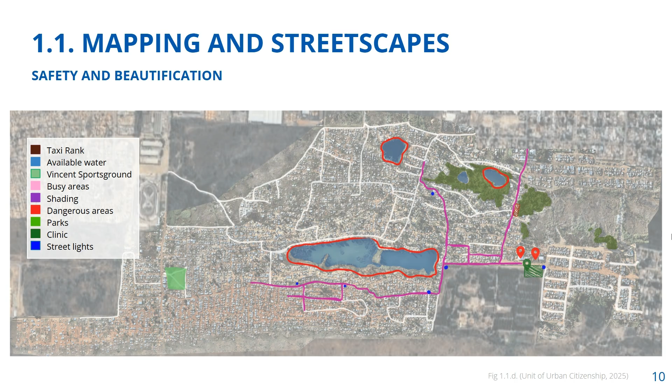The safety and beautification of Melusi is an important factor in community development. Potential areas to improve were pinpointed and discussed, from dangerous electrical wires to streetlights, and discussions around water as a key factor in ensuring safe mobility and well-being.

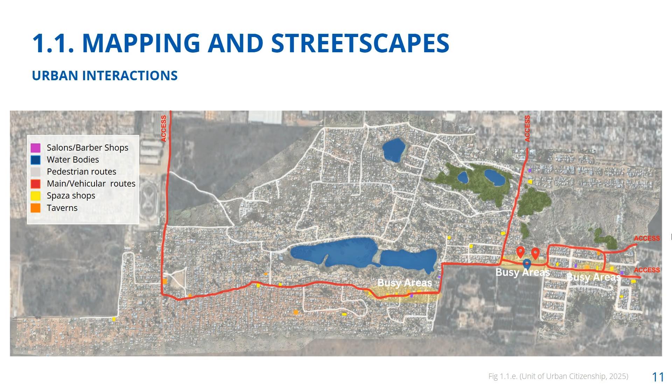In our other mapping group, we established that roads and pedestrian pathways are integral to the functioning of Melusi. Everyone is dependent on the road infrastructure on a day-to-day basis. The roads also set the stage for economic opportunities.

A desktop study was also conducted off-site to enrich our understanding of what the City of Tshwane's proposal entails. The information shows proposed roads, servitudes, and the layout of proposed residential urban areas and important buffer zones around water bodies. Our site proposal is highlighted in red.

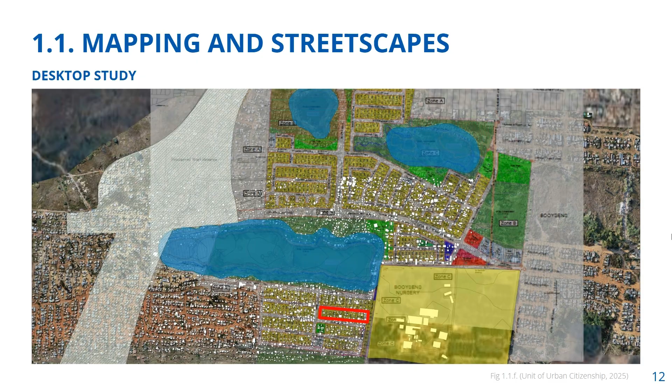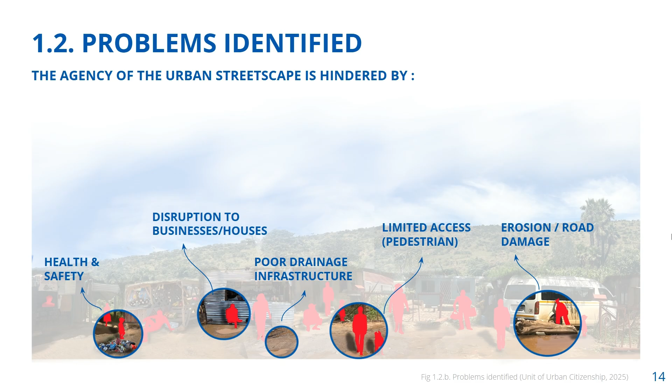Next, we identified several critical issues affecting the community. These include health and safety concerns, business disruptions, poor drainage, limited pedestrian access, and erosion. However, when we examined these challenges in depth, we found that they all trace back to a single underlying root cause: water, its movement, stagnation, and mismanagement within the community.

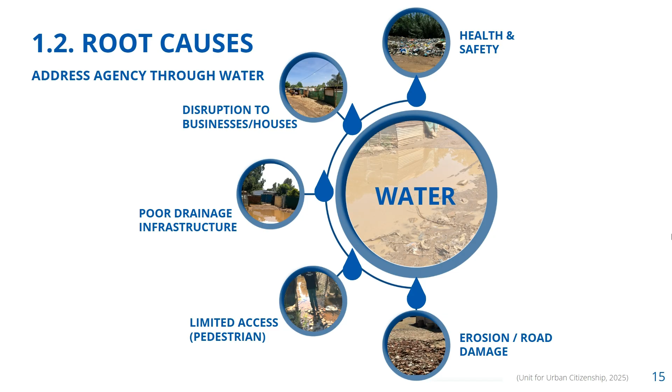Health and safety: contaminated water increases the risk of diseases. Flooded walkways increase injuries, and stagnant water creates breeding grounds for pests and rodents, thus worsening hygiene conditions.

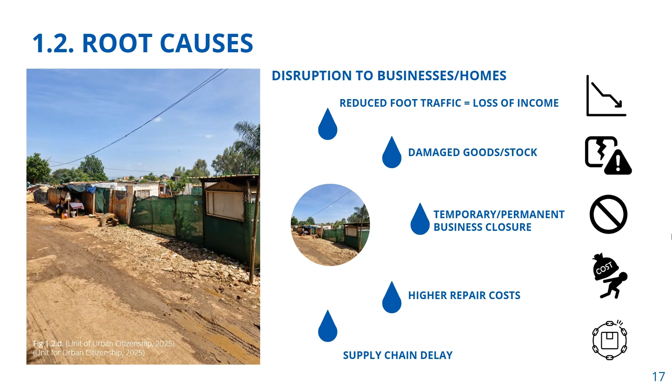Disruption to businesses: flooding reduces foot traffic, leading to loss of income. Water damage destroys goods and equipment, forcing businesses to close, and high repair costs and delays make financial recovery difficult.

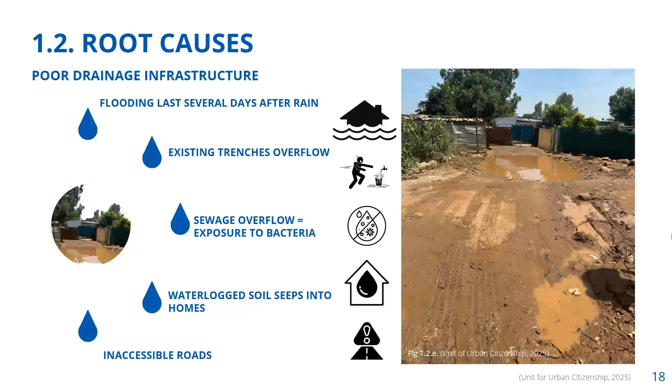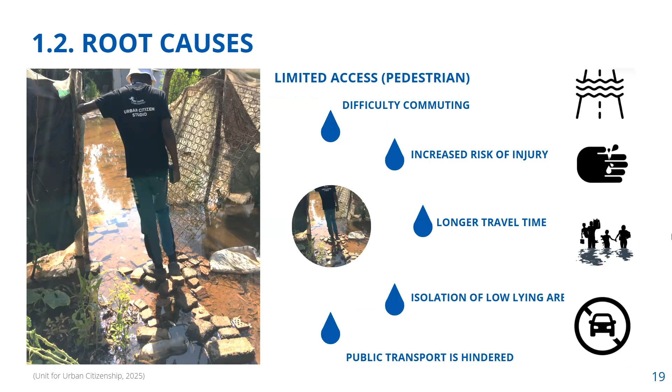Poor drainage infrastructure: floodwaters restrict daily activities, and improvised drainage systems fail under heavy rain, causing sewage overflows and structural damage. Limited pedestrian access: waterlogged paths make commuting difficult and dangerous, isolating low-lying areas, and public transport is disrupted, further limiting mobility.

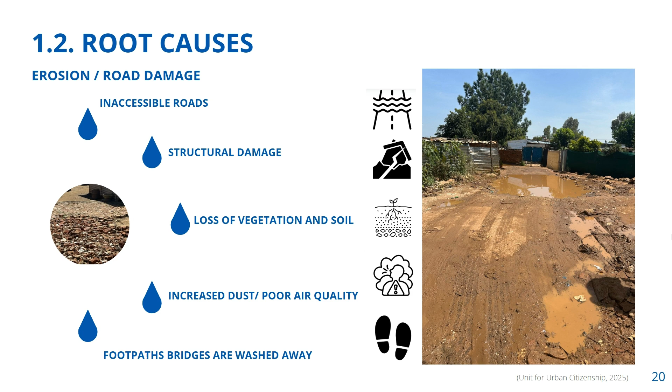Erosion: footpaths wash away, forcing residents to navigate through unsafe crossings, and weak foundations, soil loss, and dust pollution harm air quality and health. Last, we analyze the de jure and de facto.

De facto refers to what exists in reality, regardless of official policies. Currently, businesses and residents coexist along Mpolelaka Street, creating a vibrant and economically active environment. Without formal zoning support, this informal arrangement faces long-term challenges.

De jure refers to what is legally recognized or planned. This refers to the proposed residential 2 zoning by the City of Tshwane. This will limit the area to residential use only, isolating businesses from the street's edge.

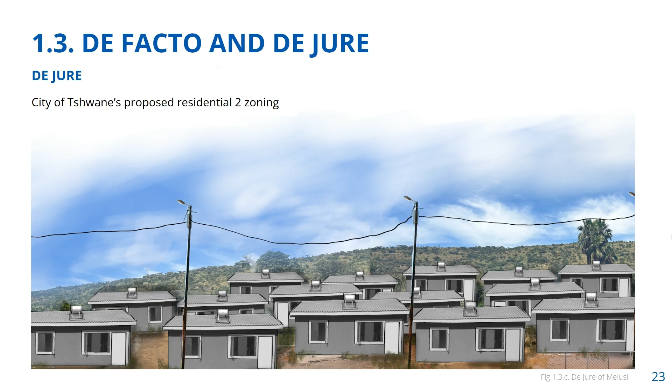A residential 5 zone allows for a mixed-use environment of residents and businesses on the same erf, enhancing the current dynamic. Moving on to Phase 2 of the Community Action Plan, identifying key issues and opportunities.

In Part 2, we looked through the lens of water and examined the surfacing problems. The first step was to reflect on 2023 and 2024's findings. Despite challenges faced around water, the community has taken proactive steps to manage water-related issues using self-implemented strategies.

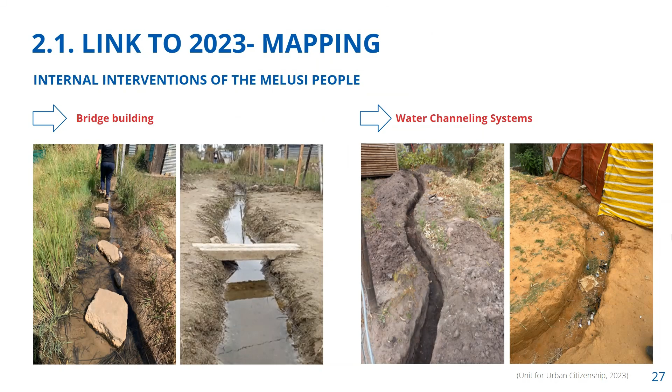These include small bridges and stepping stones to help navigate waterlogged areas. Informal water channels reduce street flooding by diverting runoff to the dam. And boundary walls and barriers redirect water away from homes.

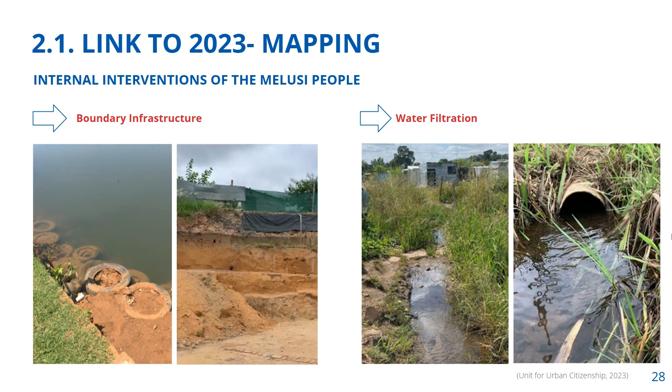These solutions demonstrate the resilience and agency of the community, showing their ability to adapt despite limited resources, demonstrating that solutions should come from within rather than being imposed from outside.

The key axiological needs, according to Max-Neef, identified as crucial in 2024, included subsistence, protection, affection, understanding, as well as participation. Our proposal focuses on the impact and effects of water as the root cause to which all these elements are related. Looking at the outcomes, it can be seen that prioritizing water access can meet all of the axiological needs.

This proves that water serves as a common problem people in Melusi face. Next, we use Nabil Hamdi's problem tree to enable us to analyze root causes. The root causes are the underlying issues such as health and safety, erosion, sewage overflow, and disruption to businesses.

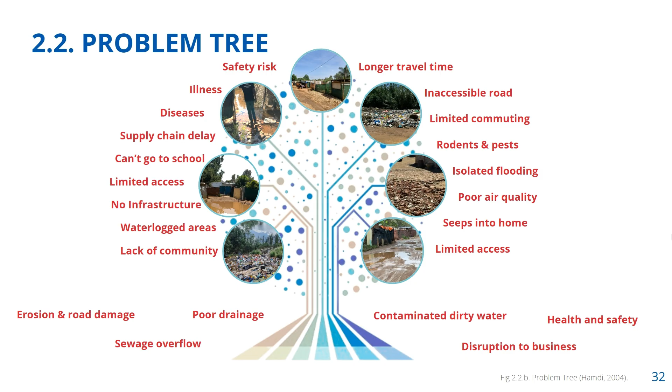The branches show the consequences of these issues. This can be injury, illness, supply chain delay, and countless more. Concluding from the problem tree, we constructed a problem statement: Melusi faces extreme flooding conditions that affect the community's daily life, posing health and safety risks. The poor drainage system and informal structures worsen the impact, limiting mobility and economic stability.

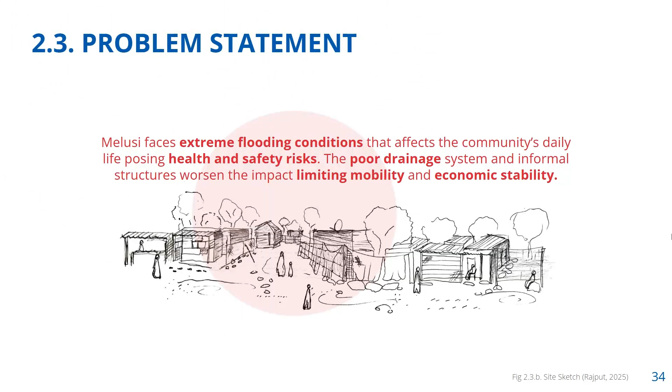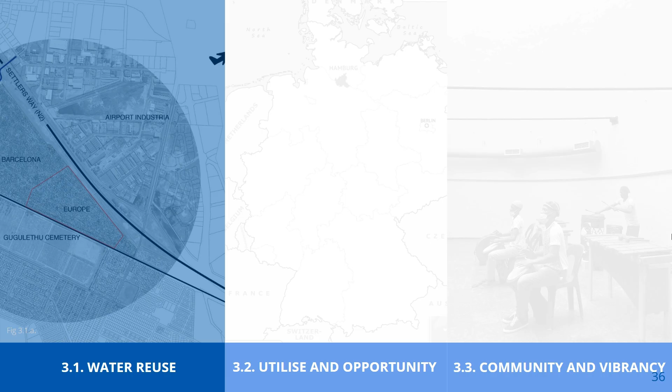Part 3 focuses on our precedent studies. Our first precedent, the Waterpoint upgrade of Europe, an informal settlement in Gugulethu, emphasizes co-creation of community projects. This project, at an established community node, is an infrastructure and public space solution that comprises two new paved plazas with ergonomically designed water points and a stormwater channel that functions as a pedestrian route and grey water diversion system.

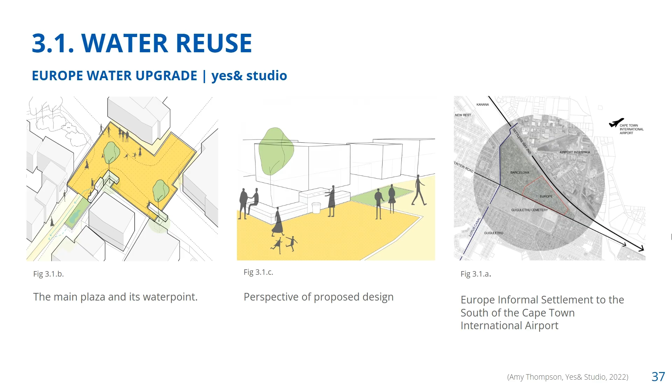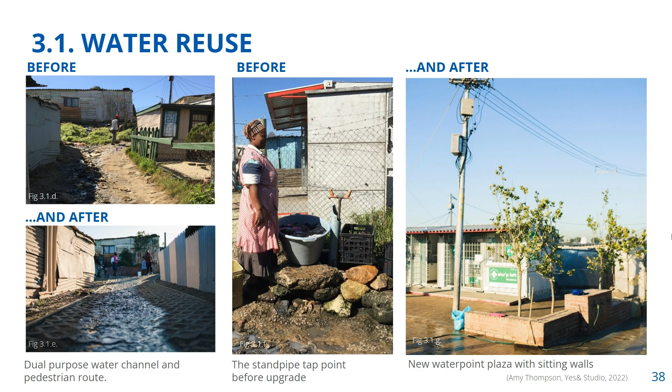Similarities between the goals of this project and what we are trying to achieve is apparent. This includes providing sufficient access to potable water and creating a positive public space that encourages gathering and social interactions, while also addressing the concern of safety and well-being through the lens of water. It acknowledges that established communities offer both social and economic networks that should not be uprooted, and supports the shift in approach towards informality, away from formal housing resettlement to a more sensitive in situ-based process.

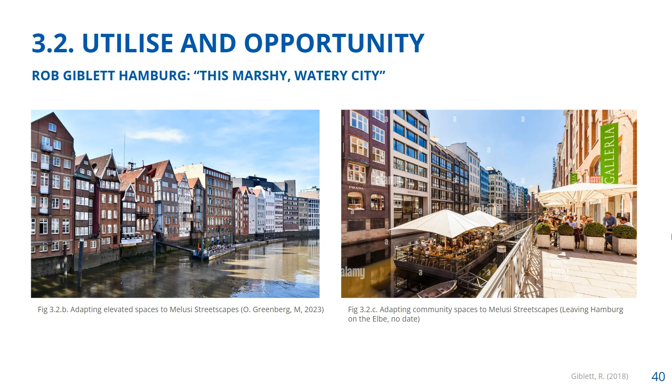The second precedent takes a look at a city built on a wetland. In Rob Giblett's book, Cities and Wetlands, he discusses the adaptive urban planning technique to accommodate the Hamburg wetland environment. Giblett does this by emphasizing the importance of protecting these ecological landscapes. This adds value to our project in Melusi as it highlights how built elevated structures can assist with these landscapes and how water can be integrated to create community spaces.

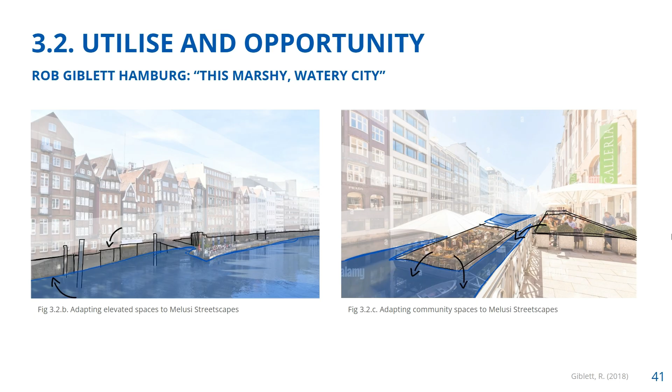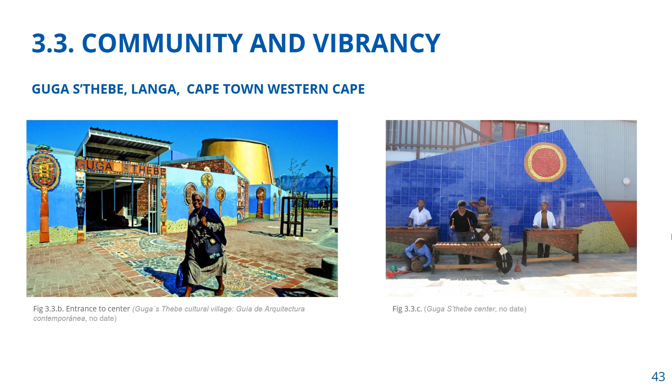Our last precedent is the Guga S'thebe Culture Center in Langa, Cape Town. This precedent integrates street agency by blending informal everyday street life with formal design. This approach encourages community engagement, empowering local residents and ensuring the center reflects their needs. It becomes a dynamic space that fosters participation and strengthens social bonds.

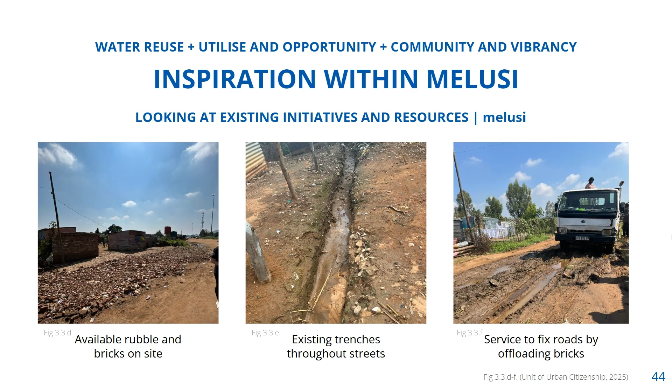Melusi has its own language and established community. With adequate resources and the willingness to create solutions, Melusi has inspired itself to make a change within their power. On our site walk, we witnessed a truck pour rubble and bricks into a hole in the road. Residents call these services and pay for it themselves. This shows us that small actions such as these help Melusi operate through people willing to use available resources.

After a thorough analysis, we are now able to define the Community Action Plan in Phase 3. Part 4 of our process aims to establish a strong basis for the way forward, starting off with our vision statement. Hamdi states that a good neighborhood is a wonderful place to grow up in.

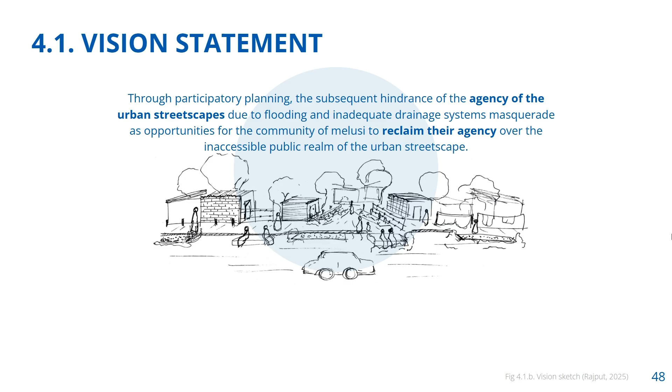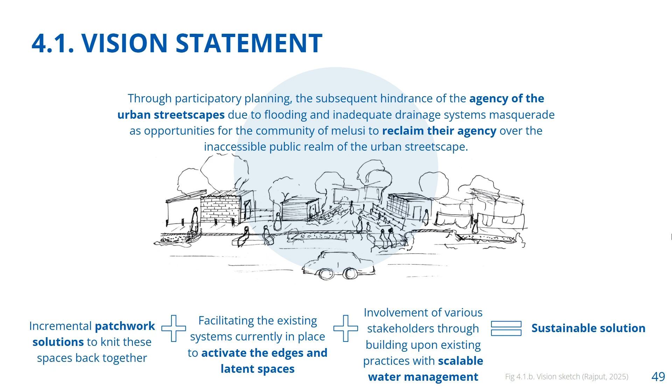Our shared vision states that through participatory planning, collaborative workshops, and knowledge-sharing activities, the subsequent hindrance of the agency of the urban streetscapes due to flooding and inadequate drainage systems masquerade as opportunities for the community of Melusi to reclaim their agency over the inaccessible public realm of the urban streetscape. This urban fabric serves as the canvas for incremental patchwork solutions to activate edges and latent spaces with scalable water management systems for a sustainable, synergistic solution.

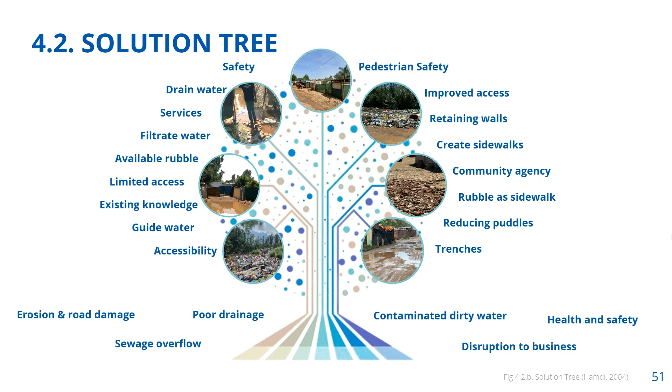Next, we developed a solution tree in response to the problems we mapped out in our problem tree. Where the problem tree maps root causes of agency issues, the solution tree leverages existing community systems to foster and stem into a vibrant streetscape. The roadmap will outline our process, adapted from Hamdi's framework, to structure our community action plan for this shared goal.

Our roadmap begins with a defined problem, followed by the community's solutions already in practice to address this problem. In some cases, these solutions address the symptomatic problem but not the root cause. This led our team towards a synergistic approach in the form of a community action plan to address this problem.

This plan is a phased approach including a now, soon, and later process. Each phase acts as a stepping stone towards the next, subdivided into a what, including what the proposed intervention is, a how, stating how the intervention will be implemented, and a who, defining who will be involved in terms of stakeholders and their relationships. The soon phase is the next stepping stone, including another what, how, and who, followed by the later phase including the what, how, and who, in order to reach the shared vision of the community of Melusi.

Part 5 expands on this framework through the lens of water, starting with designing the community action plan. Our roadmap bridges local insights with our knowledge to meet the physical and social needs of the streetscape.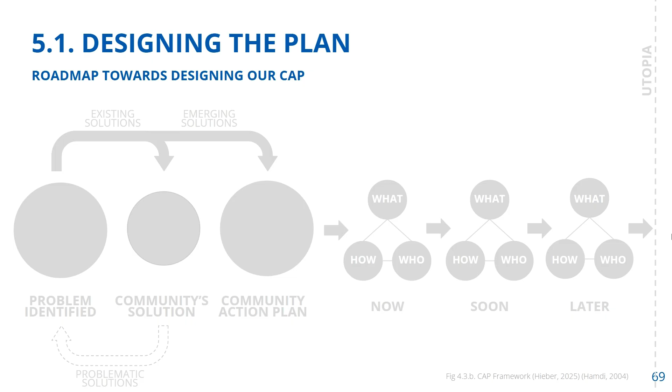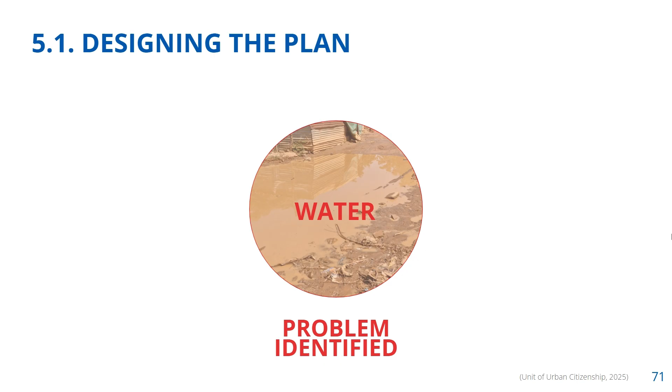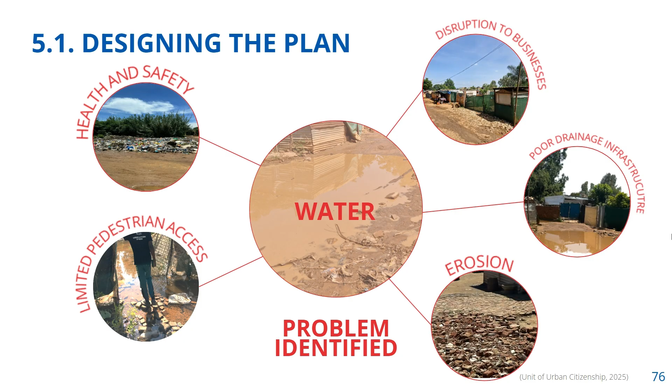The current agency of the urban streetscape has become increasingly eroded due to the physical impediments posed by water. This overarching problem fosters the problematic roots of limited pedestrian access, health and safety issues, disruption to businesses, poor drainage infrastructure, and erosion, all of which relate to the 5 most prevalent axiological needs raised from our findings and that of 2024, according to Max-Neef's Human Scale Development Needs Matrix. This being affection, protection, subsistence, understanding, and participation.

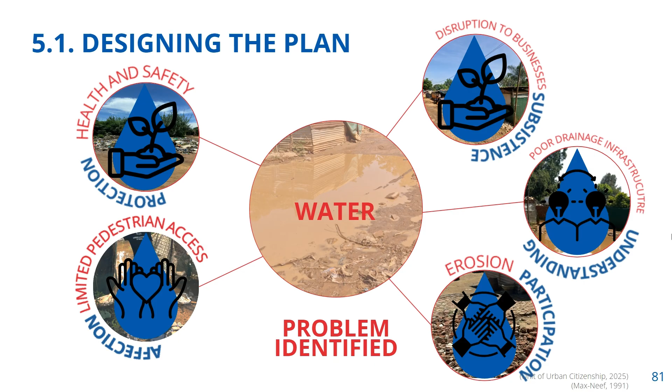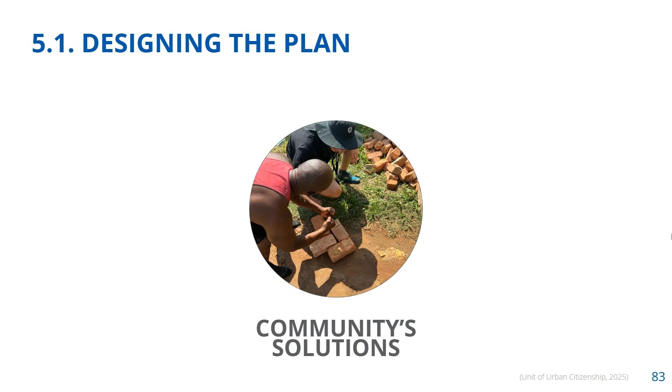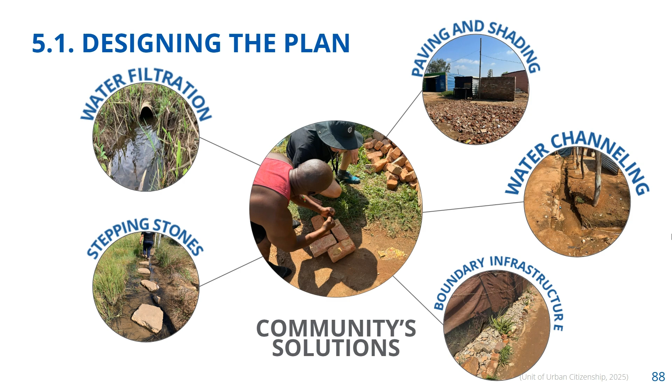As a result, the current state of Melusi reflects a palimpsest of responses to community needs evolved over time. The solutions observed on site provided valuable insights that inspired our approach, including stepping stones, water filtration systems, paving and shading devices, water channeling systems, and boundary infrastructure. These solutions helped identify available resources and areas for intervention.

Collaborative workshops established relationships to identify this shared vision. This provided a participatory way forward, including knowledge exchange, emerging solutions, stakeholders and their relationships, iteration, and real-world adaptation.

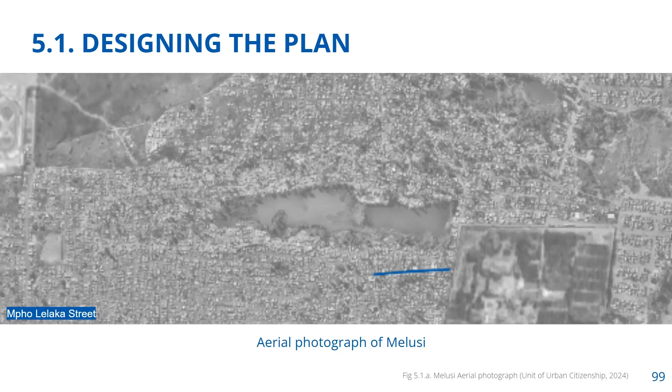Our approach pinpointed spaces with urgent priorities and divided them into actionable, community-inspired interventions. The now intervention. Leading with the what, we are focusing on a portion of Mpho Lelaka Street, which experiences high foot and vehicle traffic with frequent flooding. We are focused on managing water issues in this phase.

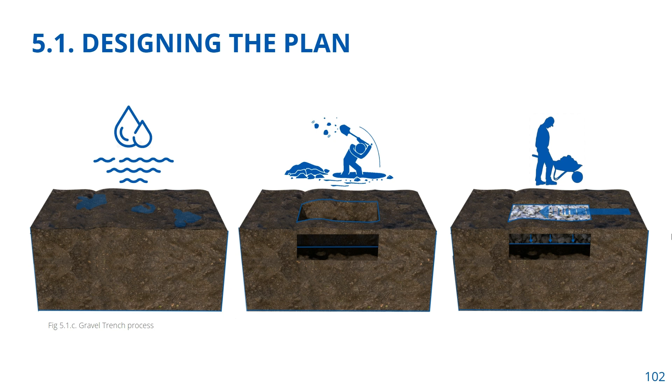The how includes an intervention between the two existing water tanks by addressing the most urgent needs first. First off, gravel trenches using community-sourced rubble to absorb water runoff, reducing its speed and volume. Next, vegetated strips from the nursery to further reduce runoff while creating a buffer between the road and the sidewalk for pedestrian safety. Then, designated areas with permeable paving sourced from the community for movement and pedestrian safety, followed by curated seating areas for resting and socializing to support the existing social spaces along the street. The final step is to potentially introduce a specialist from the Department of Water and Sanitation to assess the water quality absorbed into the trenches.

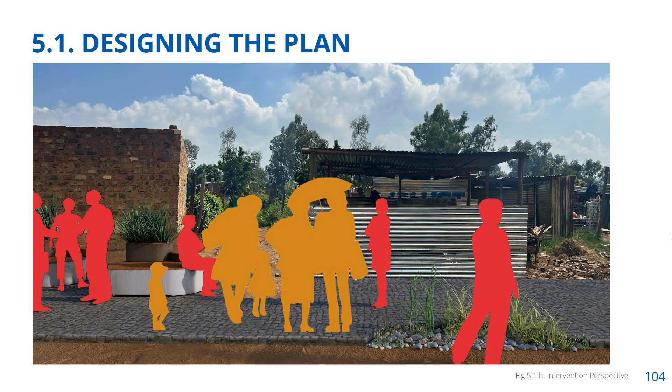The who includes the community as a key role since we utilize their methods. The Unit of Urban Citizenship will assist in planning and support, while MIDO will facilitate participation. Benefactors to possibly provide financial support, and the Department of Water and Sanitation will assess the water quality.

Next, the soon phase. The what includes extending the now phase intervention across multiple roads to create more connected spaces within the urban fabric of Melusi. As noted by the author Jeremy Till, space making is incremental. We also aim to close the loop in this phase.

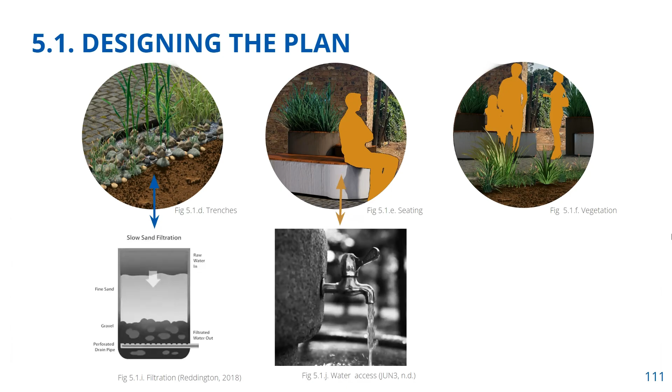We aim to capture and redirect water for reuse. The how includes where the Phase 1 water assessment will reveal if reuse is possible or if further treatment is needed.

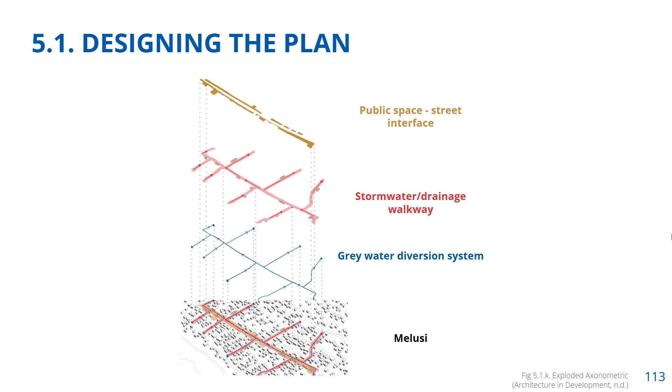Potentially, the water will be stored in the existing JoJo tanks for non-potable uses like irrigation for the nursery or cleaning, turning a challenge into a resource.

The who includes the community with the Unit of Urban Citizenship as facilitators, the City of Tshwane ensuring alignment with infrastructure planning, and experts to refine the technical aspects of the water system.

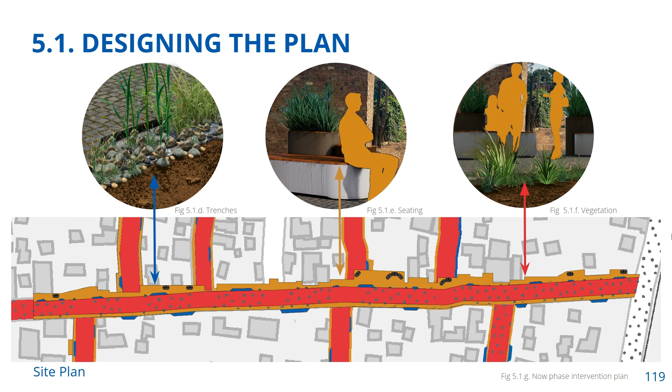The later phase. The what includes expanding what has been done in the now and soon phase across more streets. Additionally, we aim to engage with the City of Tshwane to advocate for a residential 5 zoning.

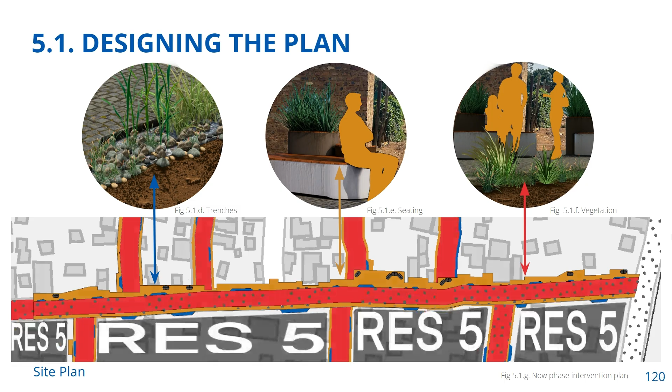For the street agency, it would allow for businesses to remain integrated with residences.

Alexander highlights in a pattern language how patterns of use shape belonging and ownership. A residential 5 zoning would strengthen rather than disrupt existing patterns, aligning with our plan across all phases.

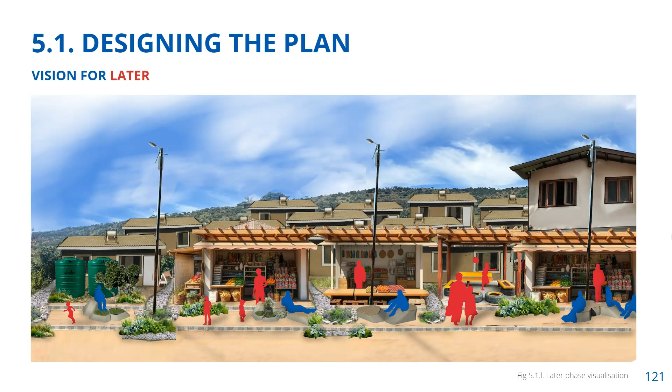This includes the water catchment, the water tanks, trenches guiding the water, interactive sidewalks, pedestrian-friendly spaces, and the mixed-use zoning.

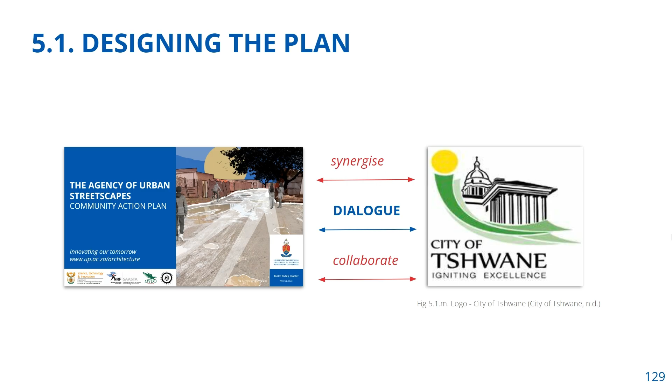How to achieve this? Our community action plan acts as a catalyst for dialogue with the City of Tshwane. The goal is to align the community's needs with city development, guided by Hamdi's participatory approach.

Moving on to the who. The Unit of Urban Citizenship advocates for a residential 5 mixed-use zoning, where our role will be classified as the mediator between the community and the City of Tshwane.

Phase 4 of the CAP explores the implementation strategy, which highlights mobilizing resources and building partnerships. Mobilizing resources include funding, people, knowledge, materials, and local expertise.

Funding can be gathered through saving groups, local contributions, and business investments. External funding, if needed, should be managed by community-led committees to align with Melusi's needs.

Sustained change relies on resident-led task groups, skills workshops, and mentorships from experienced elders to pass down knowledge. Community mapping helps track water flow and problem areas, while traditional flood management techniques should be preserved.

External experts may advise, but final decisions should remain within the community.

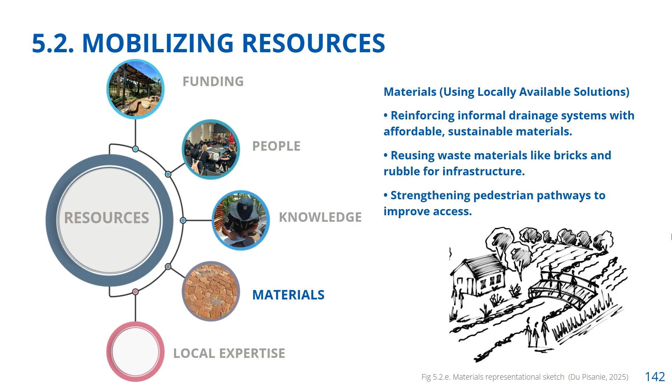Using affordable local materials like stone, gravel, and recycled waste can reinforce drainage, improve pathways, and reduce reliance on costly external resources. Formalizing community efforts ensures long-term maintenance, empowering local leaders and training residents to manage infrastructure independently.

Melusi's residents have already demonstrated resilience in managing challenges. The focus now is on amplifying these efforts by organising resources, strengthening community leadership, and refining existing solutions. While external support can assist, true change must come from within, ensuring that Melusi remains in control of its own agency.

This matrix, developed by Nabil Hamdi and Reinhard Goethert, identifies 5 levels of participation. The full control level promotes the outsider as a resource.

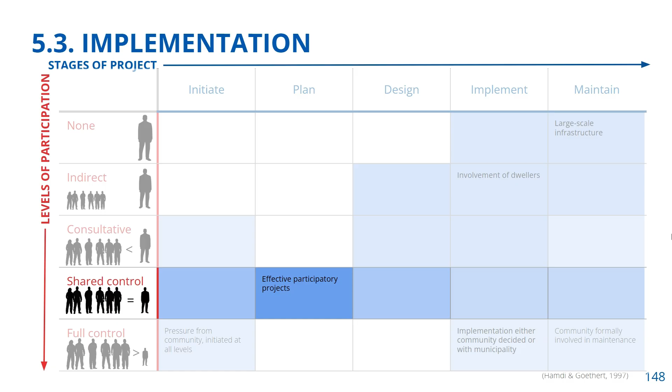This is also ideal, however, power hierarchies within the community can discriminate certain individuals. With relation to our Community Action Plan, a shared control level is considered to be ideal for participatory planning.

Phase 5 concludes the Community Action Plan. Learning by doing refers to an iterative process where community members can reflect and refine their strategy.

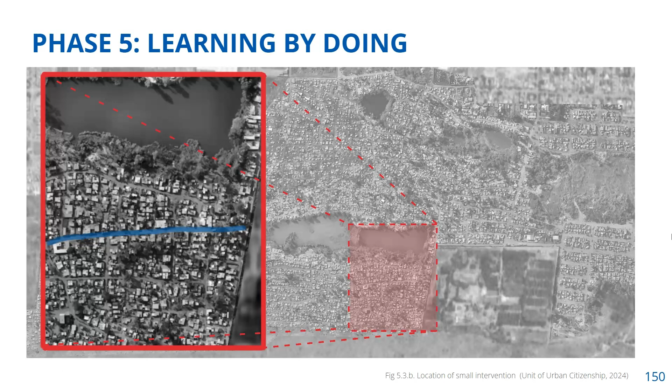We've built on the community's existing methods and skills. Small localized changes can create a ripple effect by adapting the methods the community stays engaged and can continue independently.

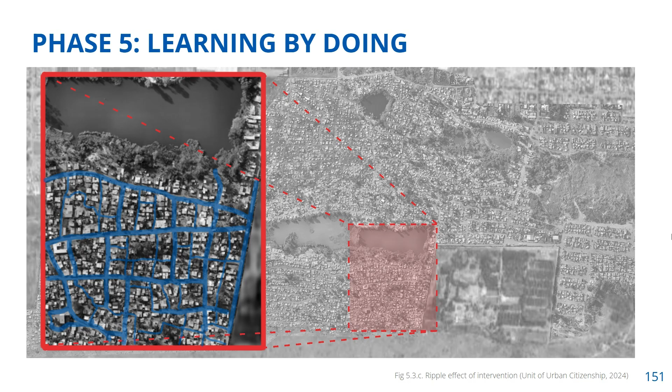In Jeremy Till's book, Spatial Agency, he states, "The act of design agency is one that critically intervenes in wider societal structures in the name of and for the benefit of others."

With scarcity, one is presented with a structure that is very real and one that is a pressing societal concern. Indeed, it may be argued that scarcity will become the defining feature of contemporary life in the coming years. It thus presents an ideal context within which agency works.

This statement reflects our process. Instead of seeing scarcity as a limitation, we have worked with Melusi to drive creativity and adaptive reuse. Our Community Action Plan embraces this and allows for spatial agency to become a catalyst for meaningful interventions.